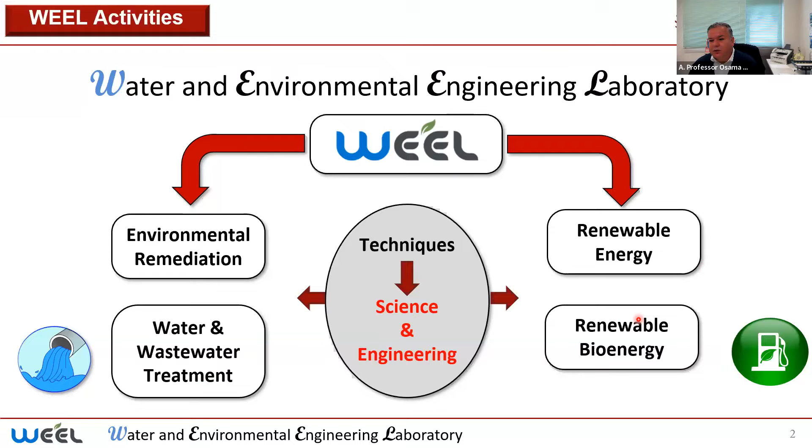So as Professor Kim mentioned, today I will talk about energy recovery potential from wastewater and integrating nanotechnology into that recovery system. Briefly, I would like to introduce my research laboratory, the Water and Environmental Engineering Laboratory. We call it WEEL. In this laboratory, we have two types of research activities. One focuses on water and wastewater treatment to recover or recycle water. On the other side, we focus on bioenergy production from organic waste released from wastewater or other agricultural or industrial activities.

So why do we focus on water? Because we believe water is the source of all life. Without water, we cannot survive on this earth. And day by day, the demand for water is increasing due to population increase, industrial activity, agricultural activity, as well as the lifestyle of people, who need more and more water as they develop

and use new technology. At the same time, we discharge too much wastewater after use, and this discharged wastewater is a main source of contaminants to our environment, including surface water like rivers or lakes, even seawater. The problem is increasing day by day, and the World Health Organization, for example, reported that in 2019, more than 144 million people were drinking contaminated water with different contaminants.

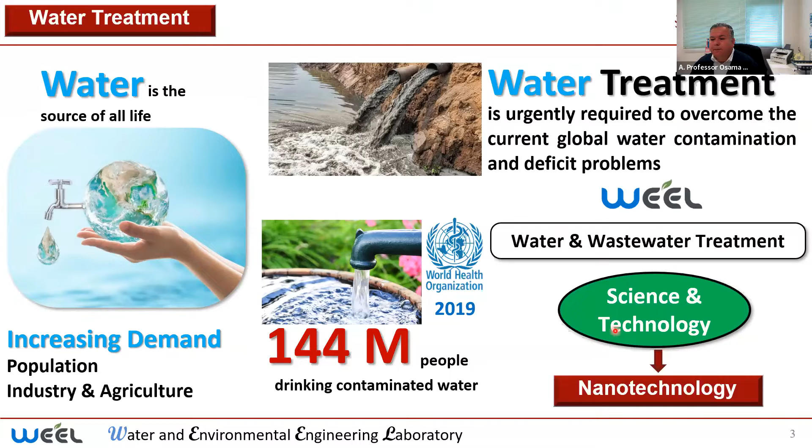We believe water treatment is necessary, first, to overcome the water deficit by recycling and reusing wastewater, and second, to protect our environment from contaminants released through the wastewater system. So in this part, we focus on the application of nanotechnology to improve efficiency and accelerate the system to get more efficient treatment.

On the other side, as I mentioned, energy is also an important part of our life. Like the water situation, demand increases day by day due to population, lifestyle, industry, agriculture, and so on. At the same time, non-renewable energy is very limited, and we face accessibility problems due to some global conflicts. Most energy now comes from fossil fuels, which we know are the source of carbon dioxide and other greenhouse gases.

Since the industrial revolution, more than 40% of the CO2 has been released to our atmosphere, creating environmental issues globally, including global warming and other problems. So we believe renewable energy is an alternative and an opportunity to recover the energy deficit and reduce emissions of CO2 and other gases, for example, wind energy, solar energy, geothermal energy, and other types of energy.

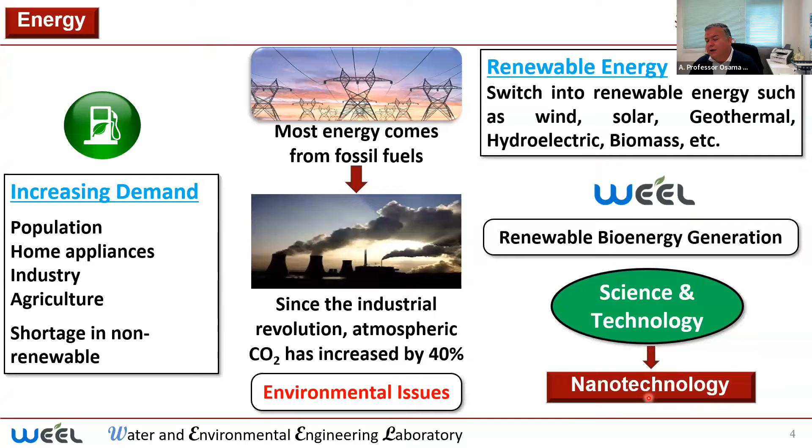So if we imagine the water and wastewater system for the urban area, usually we have water resources. Whether these water resources come from the river, seawater after desalination, lake water, or groundwater, we need to use some purification to treat and clean that water. Then we have to construct a water distribution system. The water will be distributed to homes and industry.

Later the homes will discharge the wastewater, which is called domestic wastewater or local wastewater, which is mainly rich in organic matter. On the other side, industrial zones produce and discharge industrial wastewater, which is rich in different types of contaminants, including heavy metals, nutrients, and so on. We need to collect this wastewater and treat it before discharge to the environment. Otherwise, it will be a source of contamination.

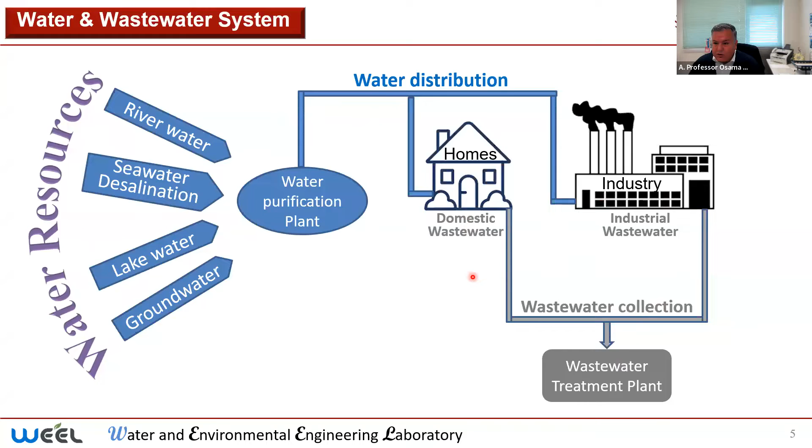But at the same time, this system needs time, effort, money; it is a very costly system if we want it to work perfectly. So we believe adopting some recovery system inside the water and wastewater treatment system will be a good idea to minimize the cost and even get some benefit.

So the wastewater can go through the treatment system to recover the water totally from the wastewater, which can later be applied for irrigation and agricultural activity, and also nutrients can be recovered through that system, which can be applied for agricultural activity as a fertilizer.

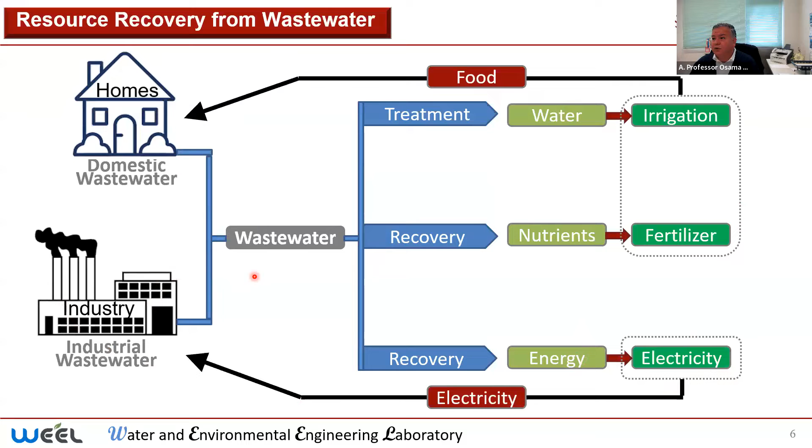Then from this side, we can produce food and return it back to human beings as a source of food. On the other side, energy can be recovered from the wastewater by degrading the organic matter to produce electricity, which can be returned back to industry as energy. So applying this concept, we can get some benefit from the wastewater. Instead of being considered a waste, wastewater can be a resource.

So what's the problem with wastewater? Some huge cities and urban areas generate a huge amount of wastewater in a small area. This huge amount of wastewater causes several problems to our ecological system. And if we discharge this wastewater without proper treatment, it will be a big source of contamination for our environment. It seems likely that 80% of the wastewater is released into the environment sometimes without treatment or without sufficient treatment. That is a really big issue worldwide.

And why does this sometimes not work? Because the treatment and transport of water and wastewater consume too much energy, approximately 1 to 4% of the total electrical power. For example, in the United States, about 3%. That means it is very costly compared with the benefit from this system. So some cities or countries ignore working on that system.

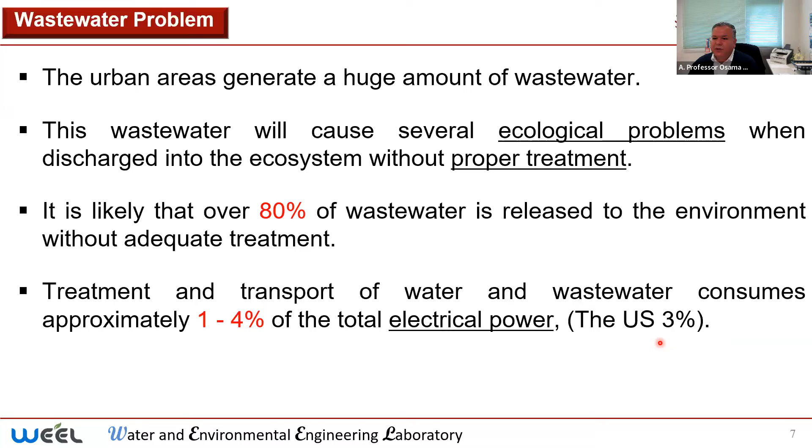But we have to remember domestic wastewater contains approximately 99% water. Only 1% includes the organic and inorganic matter, suspended or dissolved solids, as well as microorganisms, bacteria, and so on. Due to this 1%, we need to treat this wastewater before discharging it to the environment. Wastewater is 99% water, and only due to this 1% do we call it wastewater. By removing this 1%, we can call it water. So it becomes a resource for our life, not waste.

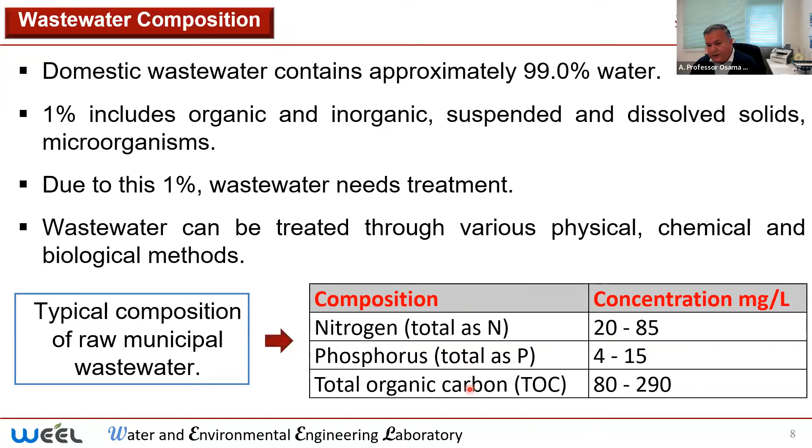Typically we use different treatment techniques to remove that 1%. Physical, chemical, and biological treatment can be applied to remove the organic matter and other chemicals from the wastewater. The typical composition of wastewater is 20 to 85 milligrams per liter of nitrogen components, 4 to 15 milligrams per liter of phosphorus components, and about 80 to 290 milligrams per liter of organic matter. The organic matter is the store of energy. We can convert this organic matter into energy by applying some technology.

As I mentioned, economic development and demographic growth put too much pressure on the demand for fresh water and energy. The annual wastewater production is estimated to be 4.5 × 10^11 cubic meters per year. This is a very huge amount of wastewater. By recovering the water for irrigation, nutrients as fertilizer for agriculture, and biogas as energy, we can get some benefit from it.

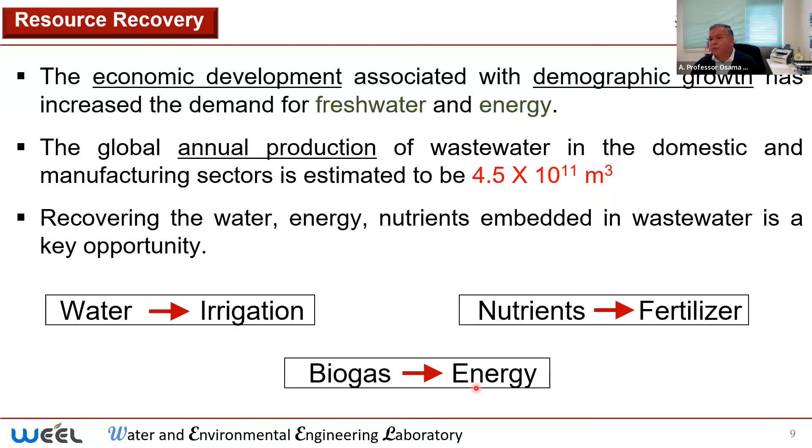Usually, we evaluate wastewater by two main parameters: biochemical oxygen demand, BOD, and chemical oxygen demand, COD. Most people think about those two parameters. They evaluate how much the wastewater is contaminated by organic matter and how much of a problem the wastewater is.

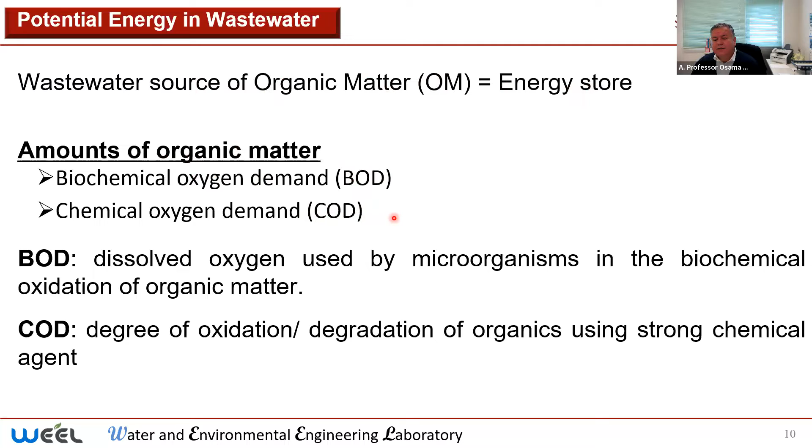So when the BOD and COD increase, we consider this as waste. But on this side, we can consider the BOD or COD as an evaluator for the amount of organic matter, which is equivalent to the energy stored inside the wastewater. So we have to look at the BOD and COD not as a parameter representing the waste and the problem; it represents the energy stored in the wastewater.

So we try to work in two systems here to recover the energy. Actually, there is a potential energy in wastewater of about 10 kilowatt hours for each cubic meter. And in the wastewater treatment system, we consume less than 1 kilowatt hour per cubic meter. So in other words, we have energy stored in the wastewater 10 times greater than the energy needed to treat the wastewater. So if we are able to recover part of that energy, we will recover the cost of the treatment and maybe get extra energy. So in this regard, we apply the anaerobic digestion system.

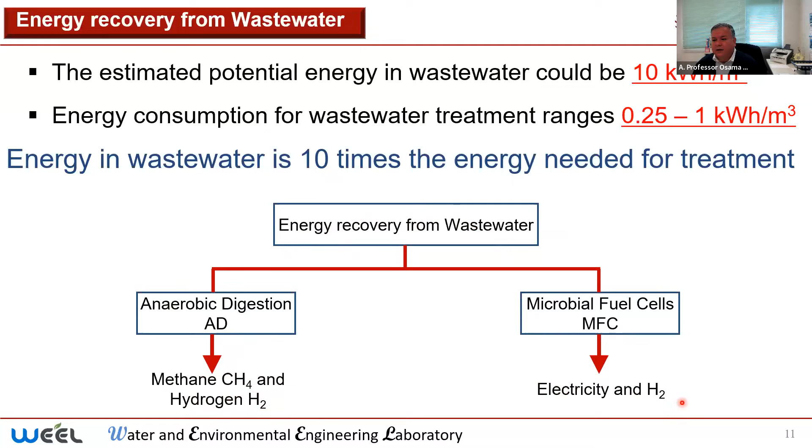And in the anaerobic digestion, inside the reactor, the mechanism works like that. The microorganisms, the bacteria, degrade the organic matter which exists in the wastewater and convert that organic matter into biogas in the absence of oxygen, because this is an anaerobic digestion system without oxygen. And then we have gas produced from this anaerobic digester. After some purification process, we can apply this gas as a source of energy to produce electricity, or maybe apply it to some cars, like hydrogen cars or methane cars, and so on.

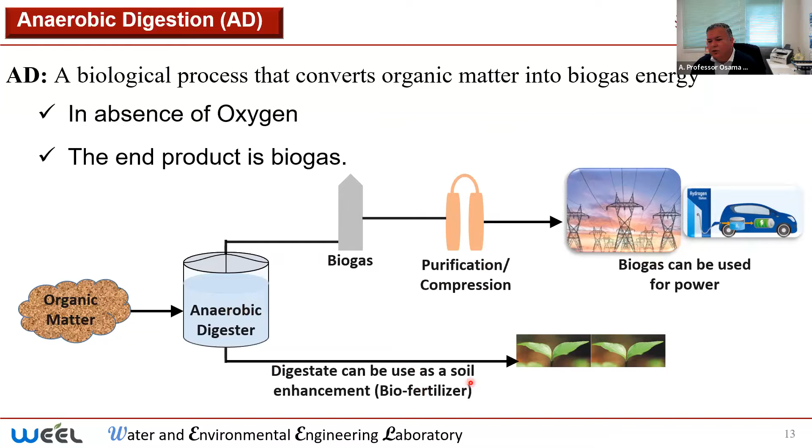On the other side, we have a byproduct produced from this, which is concentrated organic matter and can be considered as a biofertilizer to improve the soil and enhance agricultural production. So we can get both sides. So typically, the biogas produced from this system contains about 50 to 75% methane, 25 to 50% carbon dioxide, 5 to 10% hydrogen, some nitrogen gas, maybe less than 2%, and some traces like hydrogen sulfide.

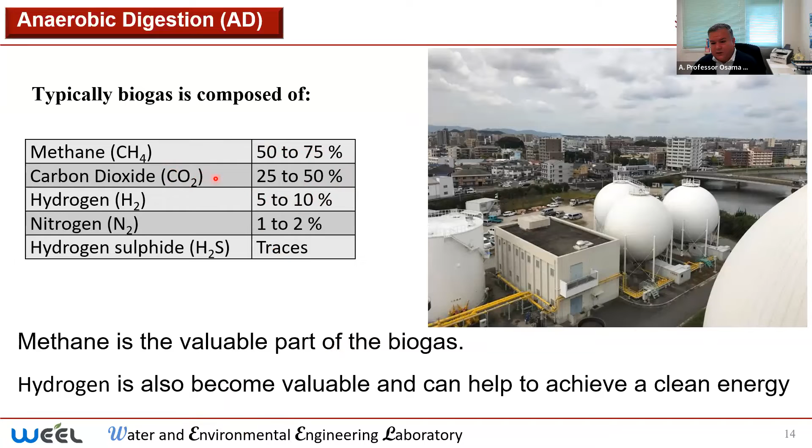So we consider the methane as a valuable part of the biogas because we can convert methane to energy directly, and hydrogen also becomes valuable because there are many applications now for hydrogen as a clean energy. So in our study, we try to improve the production of methane or hydrogen as an energy source, and reduce the production of CO2 from the anaerobic digestion system. So I just want to share this study. We conducted this study in 2022. And in this study, we tried to improve the anaerobic digestion system by applying some iron nanoparticles.

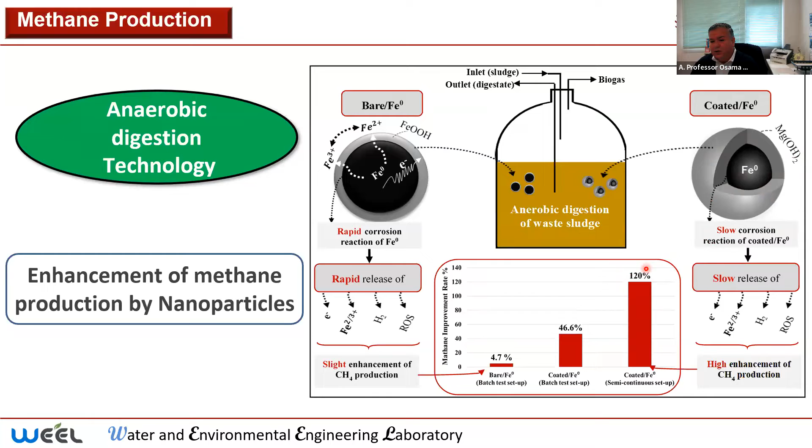We have pure iron nanoparticles, and at the same time, we have coated iron nanoparticles. And we try to investigate and understand the interaction between those nanoparticles and the system itself, which contains the wastewater, microorganisms and so on. It's very complicated inside, but we tried to classify the mechanism inside. By the end of this study, we were able to improve the methane production by more than 120% compared with the normal control system. So it was a very good achievement using this coated iron nanoparticle to improve the methane production by more than 120%.

For example, this figure shows how much the total biogas improved when we apply just 25 milligrams of the coated iron nanoparticle. So we got a 95% improvement in biogas production compared with the control or normal system. On the other side, the methane produced from this system increased by 122% compared with the control. So this nanotechnology not only increased the biogas by 95%, but also increased the percent of methane inside the biogas by more than 13.8% compared with the normal way. So we were able to increase the total biogas, and we also increased the methane content.

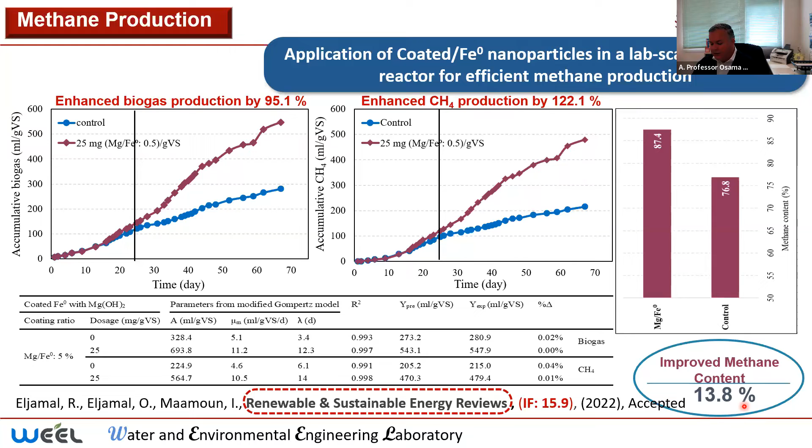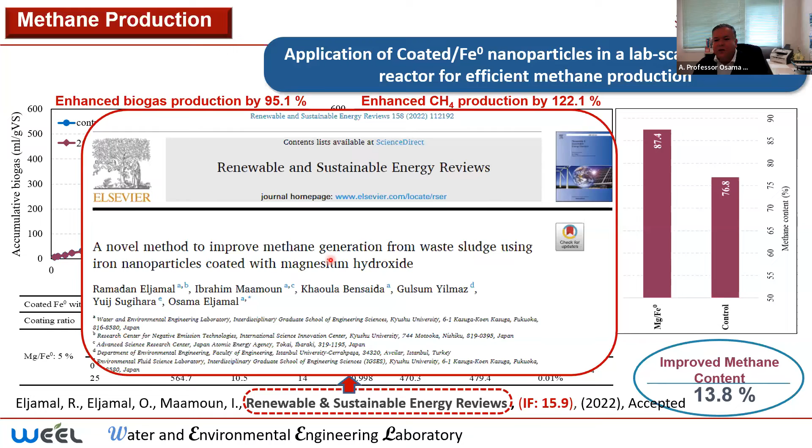So this study, with many more details and information, has been published in the Renewable and Sustainable Energy Reviews journal in 2022, under this title: A Novel Method to Improve Methane Generation from Waste Sludge Using Iron Nanoparticles Coated with Magnesium Hydroxide.

We also apply the concept of the nanoparticles to recover or remove the phosphorus as a nutrient from the water, and we simulate the situation of the permeable reactive barrier, which is a kind of barrier that can be constructed to treat the groundwater from the contaminants.

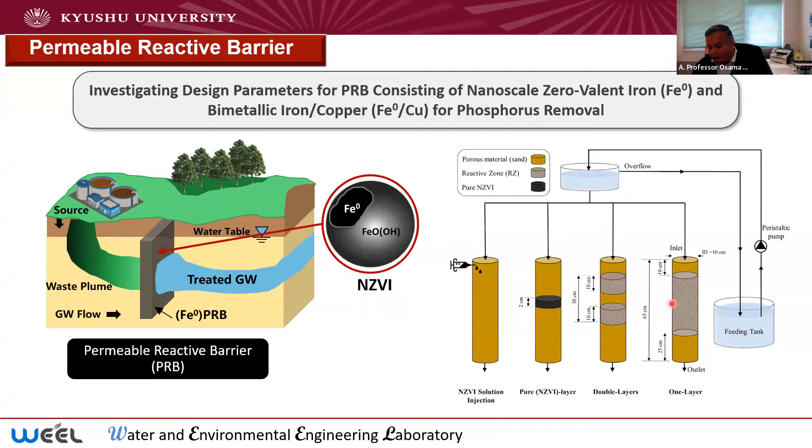So in this case, we apply several scenarios to introduce the nanoparticle into the permeable barriers. We use, for example, injection. We use one layer of our nanoparticle, two-layer mixing, and actually more than 12 scenarios to find the best way to introduce the nanoparticles into the permeable reactive barrier to remove the phosphorus in this case, and maybe in other cases, we can remove different contaminants.

So in this study also, we clarify the mechanism of the removal of phosphorus from the groundwater using the bare iron and the bimetal. We here apply different iron nanoparticles, which is iron with copper, and we call this one iron copper bimetal. So we clarified all the mechanism to remove the phosphorus from groundwater through this study, and we found that injection is the best way to deliver the iron nanoparticle into the system to remove or to recover the phosphorus from the system.

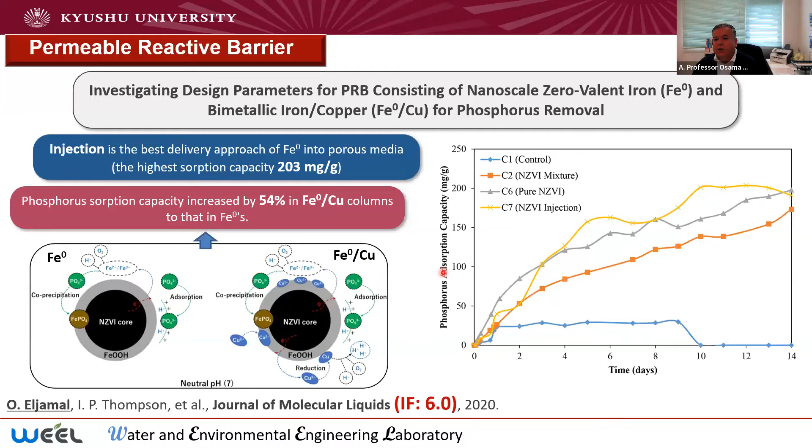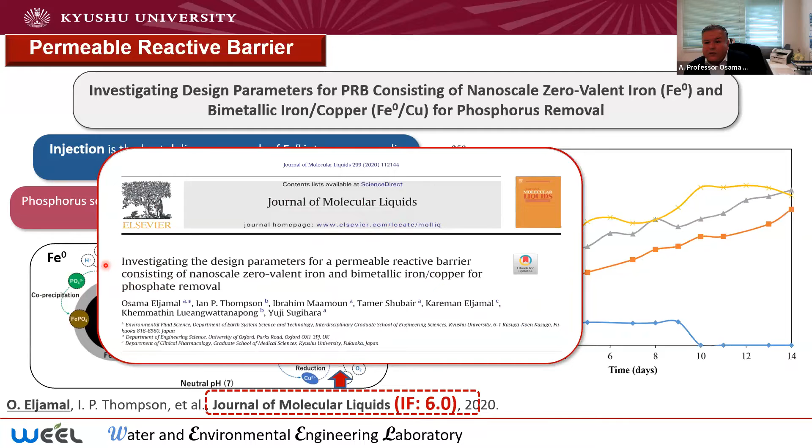And this information also has been published actually in the Journal of Molecular Liquids in 2020 under this title, Investigating the Design Parameters for Permeable Reactive Barriers consisting of nanoscale zero-valent iron and bimetal iron copper for phosphorus removal. Actually, we work in this project along with Professor Ian Thompson from the Department of Engineering Science, University of Oxford, United Kingdom.

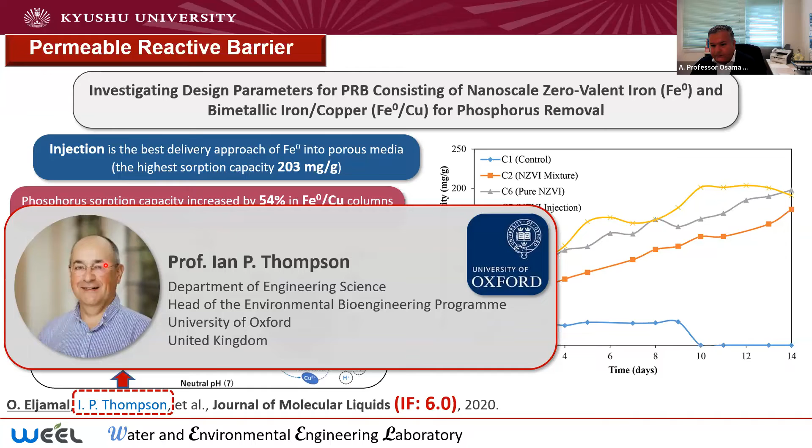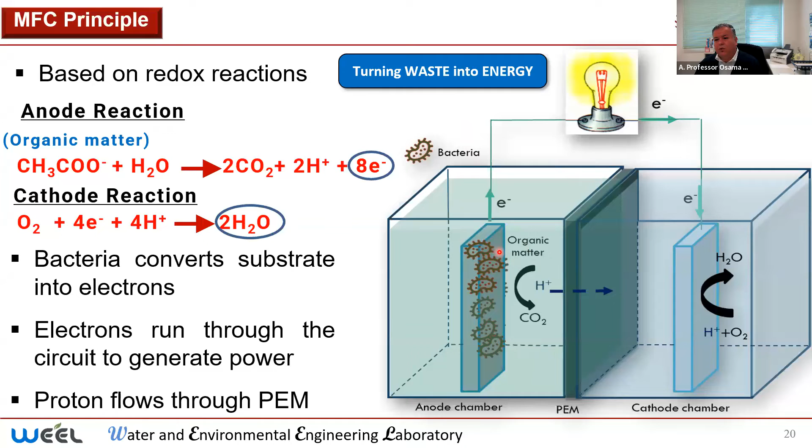The electron and the proton meet in the cathode side with the existence of oxygen, forming H2O, water. So in other words, this device can produce electricity from this side and water from this side. Both are environmentally friendly, but we have to remember CO2 also can be produced from the anode side. We have to work to reduce the CO2 production from this system.

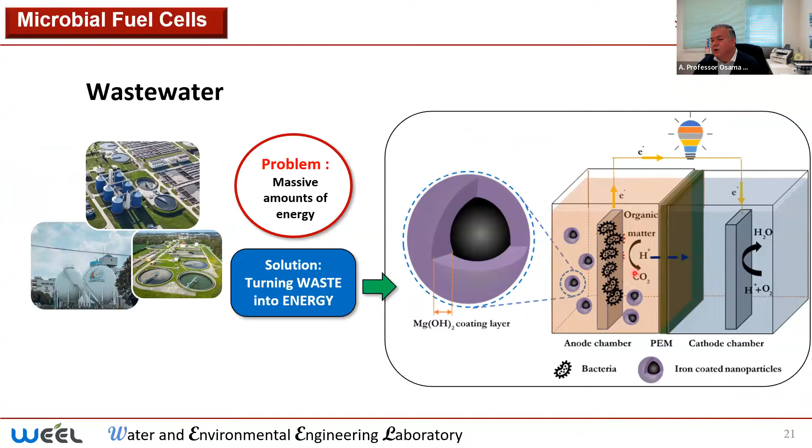So in this study, we try to improve the efficiency and accelerate the electricity production inside the microbial fuel cell by introducing the nanoparticle into the anode side to improve the production of electrons and protons and increase the degradation process of organic matter or wastewater. So we apply several types of iron nanoparticles and nanoparticle engineering.

Anyway, we apply this particle into the microbial fuel cell, and with different conditions, with different scenarios, we optimize and operate those microbial fuel cells for a long time. And then we got a good achievement, a good result from this operation. We were able to increase the voltage 441% compared with the normal control one by adding some iron magnesium coated particles. And at the same time, this system also improved the removal of the organic matter from the wastewater inside the microbial fuel cell by 25%.

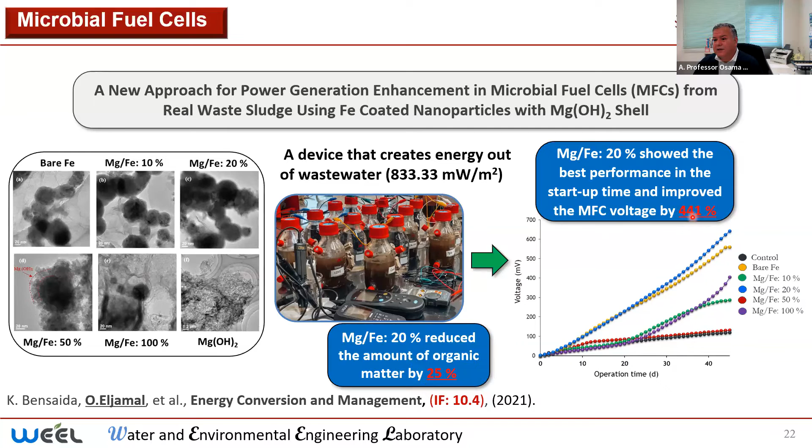So we got here two benefits. One is improving the removal of the organic matter, and the other is increasing the production of electricity inside the microbial fuel cell. There are too many details actually, because we investigate several parameters, several factors. We optimize those things to get the electricity and reduce the organic matter.

We have done many studies with these two technologies, either anaerobic digestion or microbial fuel cell, or on the other side with water and wastewater treatment using nanotechnology. But today I just summarize with two examples.